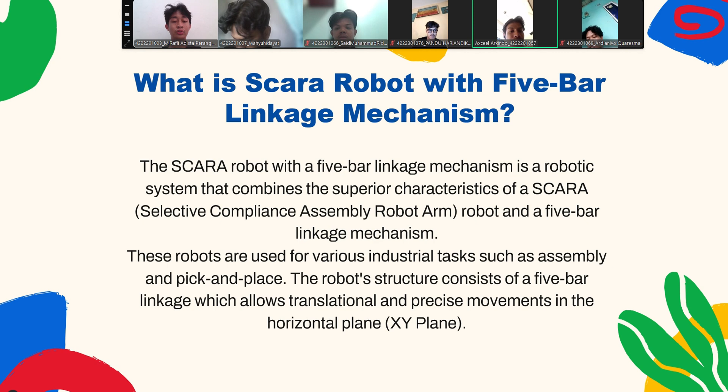In the mechanical design, the concept of the SCARA robot with 5-bar linkage mechanism is to assemble and perform pick and place tasks. We use 3 stepper motors, NEMA 23 and NEMA 34, to do movement in X, Y, and Z. We use aluminum profile 3030 and 2020 as the 5-bar linkage and pillar, aluminum profile T as the base, and lead screw as the linear motion.

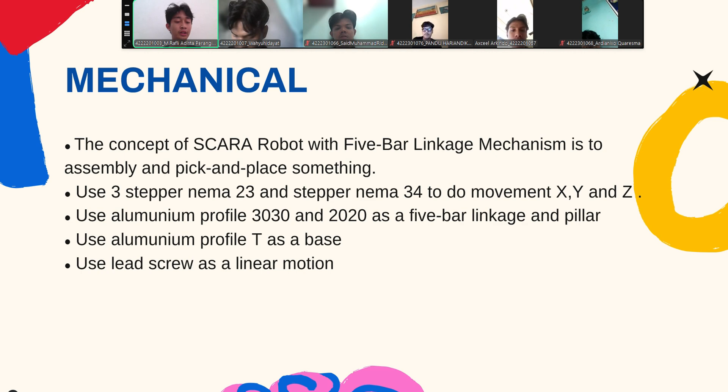This is the physical form of our robot. This robot has a rigid arm structure, allowing for precision.

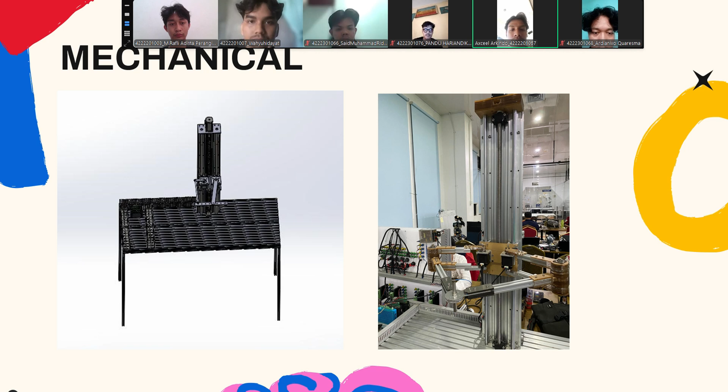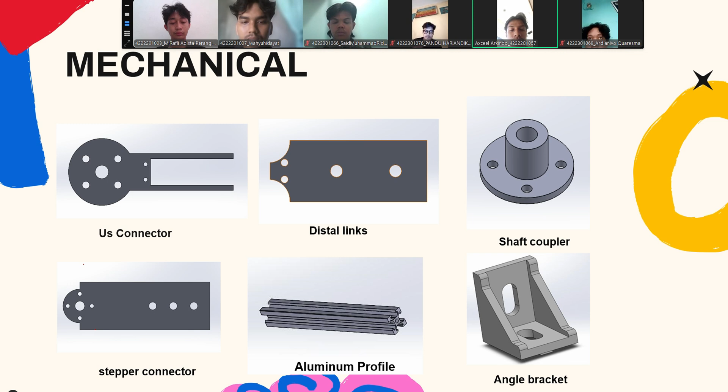Previously for this mechanical design, we made parts as shown in this figure: connector, distal links, shaft coupler, stepper connector, aluminum profile, and angle bracket.

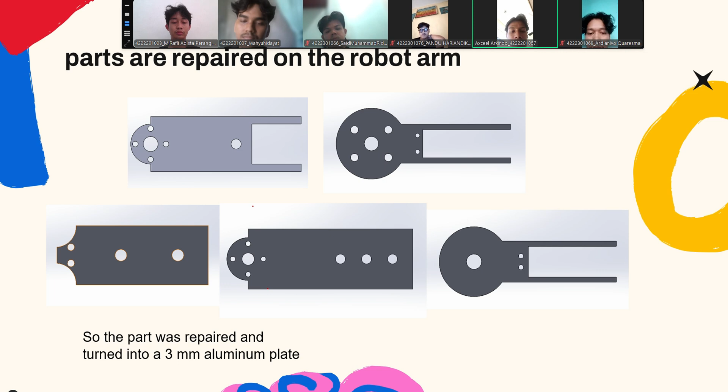This is the part that was repaired. The part was repaired and turned into a 3 millimeter aluminum plate. The process of cutting the part uses the laser cutting method.

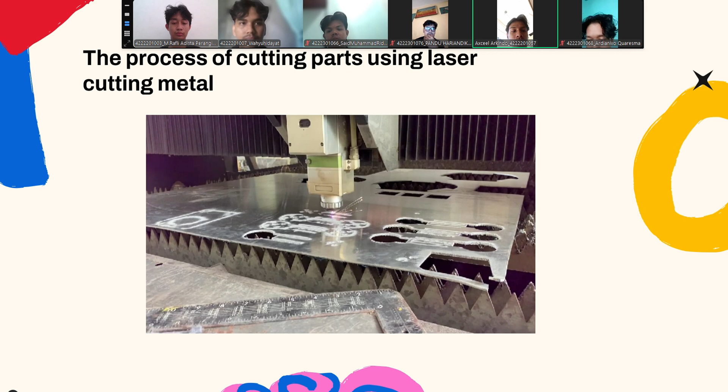For the next step, I have a plan to change the design of this robot. I will show it at the end of the slide.

This is the PLC stand. Its length is 500 millimeters, width 500 millimeters, height 631 millimeters, and it uses aluminum profile measuring 30mm x 30mm. There is a PLC TM241CA4R, micro step driver, push buttons, NO, NC, and indicator lights.

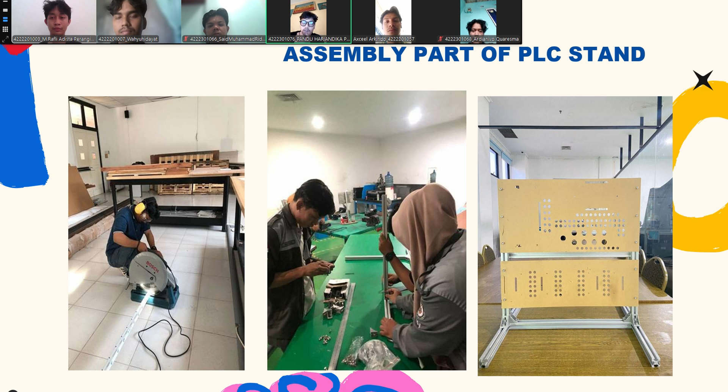This is the assembly of the PLC stand parts.

We use 3 stepper motors: one NEMA 34 and two NEMA 23. We use two TB6600 motor drivers and one HBS57 motor driver, and a Schneider PLC TM241CE40R series as microcontroller, with 6 push buttons, 4 limit switches and 3 LED lights. The NEMA 23 stepper motors are controlled by the TB6600 motor driver, and the NEMA 34 stepper motor is controlled by the HBS57 motor driver. All components are controlled by the PLC.

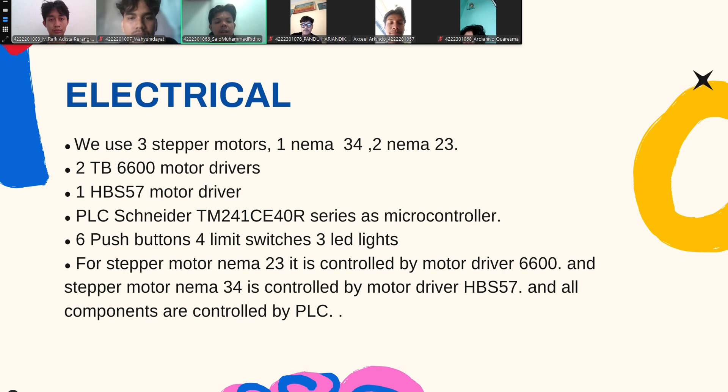This is the schematic wiring diagram. On the left side we see two drivers for up-and-down movement, and another for left-and-right movement. Each driver is connected to its own stepper motor, shown right below them. The drivers get their power from a 24-volt DC power supply, shown at the top center. We also added a resistor of around 2K ohm to ensure signal stability between the PLC and the drivers.

On the PLC side, the outputs like Q4, Q5, and Q6 are wired to the pulse and direction terminals on the stepper drivers. These outputs tell the motor when to move and which direction to go, and the trigger and reset lines are also connected to control motor behavior more precisely.

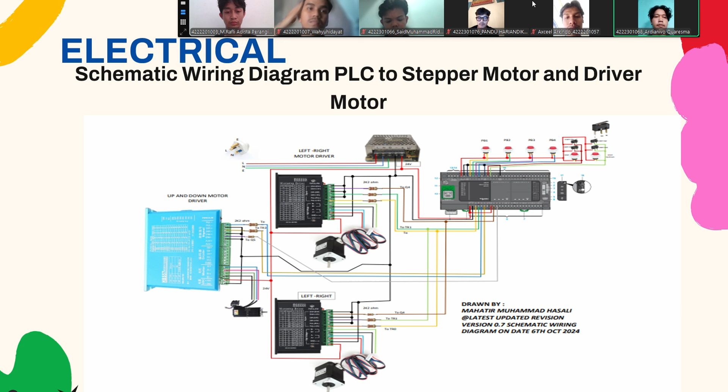This is the full wiring schematic diagram. The PLC sends signals to the motor drivers through Q0 to Q3 for output, and each motor M1, M2, M3 is connected to its own driver. Overall, this wiring diagram forms a complete system where the PLC acts as the brain, the driver acts as translator, and the motor does the actual movement. The buttons and sensors help us interact with the system and keep things running safely.

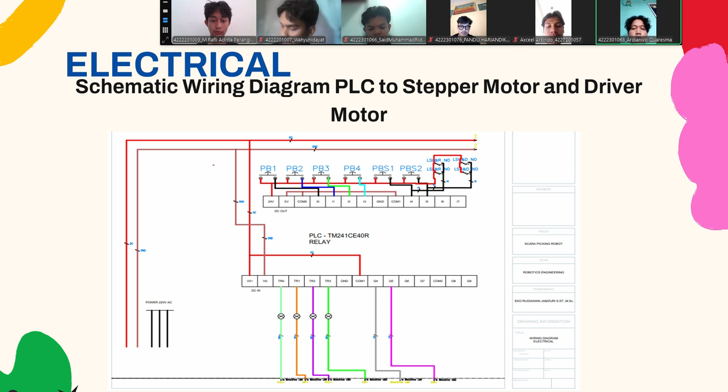This is how the components are placed.

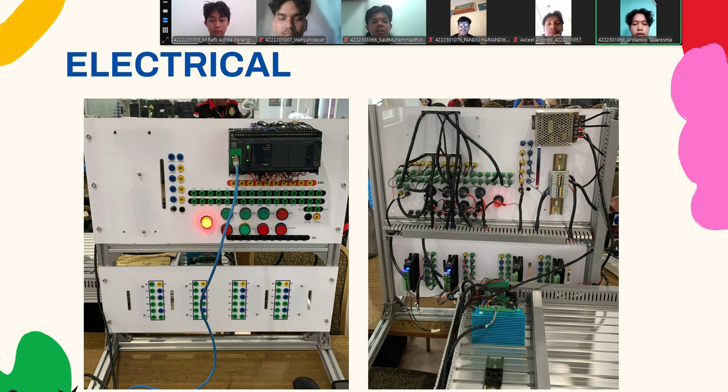This is the next plan for 2025. First, there is a change in the mechanism from the SCARA 5-bar linkage to a parallel mechanism. Second, an update to the PLC trainer stand and the addition of a gripper.

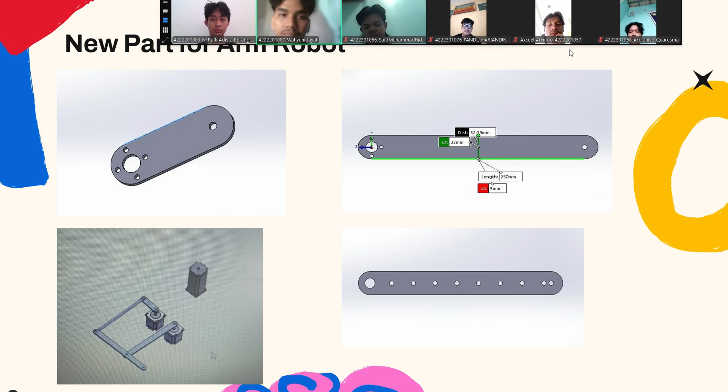This is a new part for the arm robot. The part is 5 millimeters thick and 250 millimeters in length. This is the stepper part for the new robot design.

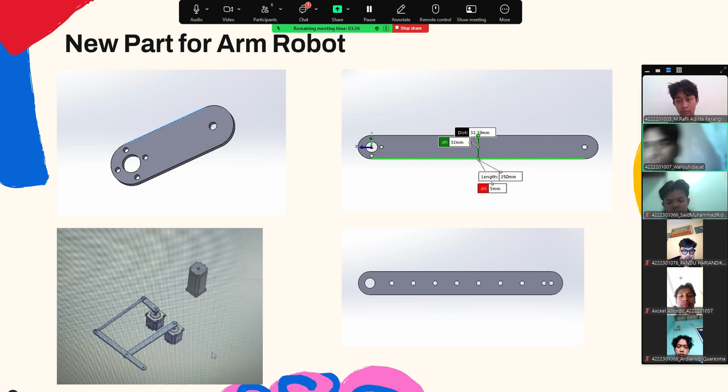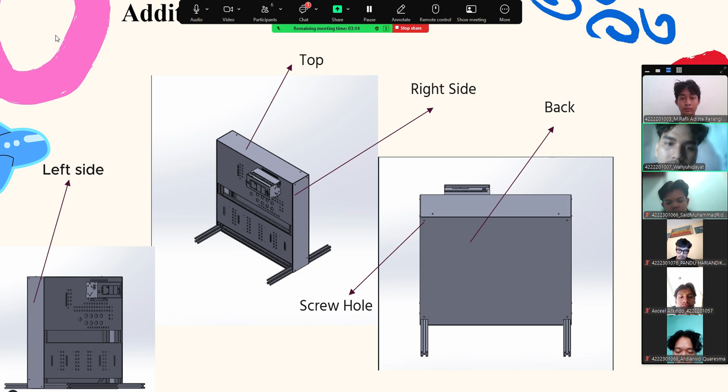Next, this is the addition of the cover for the PLC stand: the top, the right side, and the left side. This is the back side and the screw holes.